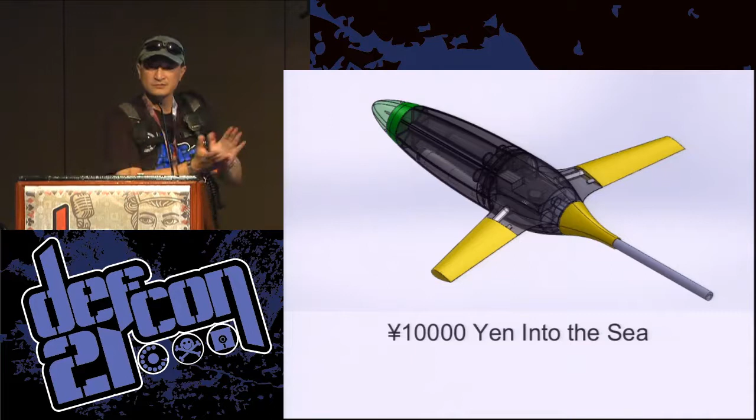Hello. So, as he said, I'm Flipper. This is my talk, 10,000 yen into the sea. Essentially, well, just to start with, can I get a show of hands? Who enjoys filling up their gas tank? Yeah, I'm not a big fan of it either.

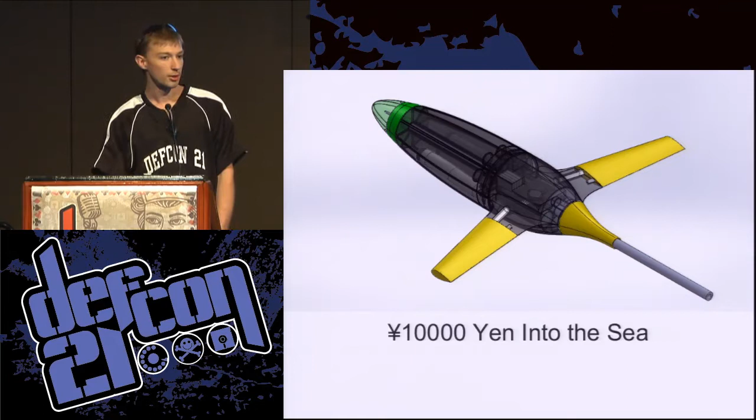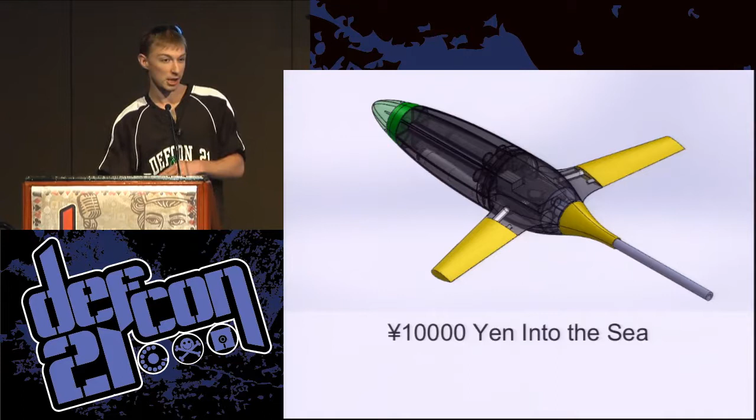Actually, I spent 4 years commuting to and from my community college. 4 years, 2-year program. I had other things to do. So it was a 45-minute drive each way, so I pretty much ended up putting about as much money into my tank as I saved by living in my parents' basement. So all the benefits of living in my parents' basement with none of the cost savings. So that was kind of an interesting experience.

And the reason why this is relevant is shortly after college, I saw underwater gliders, and they kind of blew me away because when you see the typical range and duration of these things' missions, it's pretty incredible. Around 3,000 kilometers on a single battery pack charge.

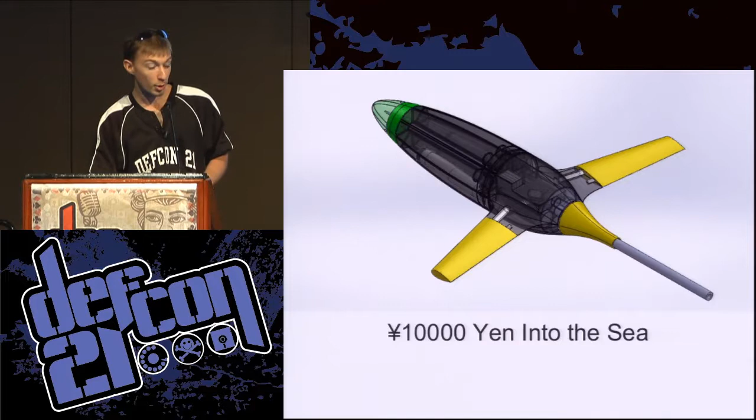And I work with electric vehicles professionally, partially as a consequence of this project. And I got to say, if you can show me a Nissan Leaf that can go 3,000 kilometers, I'll be pretty impressed. One of my coworkers says it's all about the drive cycle.

So, as I said, I'm Flipper, and this is kind of what I do, electric vehicles. Professionally, they're ground vehicles here, underwater. I keep on trying to talk my boss into letting me turn one of our vehicles into a submarine, but so far, no such luck.

So, you know, I'm finished with my education and not much in the way of job options at the time, kind of dead-end jobs, and I'm killing time in the bathroom because I didn't really like my job. Reading the Oregonian, and I see an article on Oregon State University's underwater glider program. And they were talking about how they work. They show a little cutaway diagram, and I'm kind of blown away.

It's all like, wait. How much do these cost? I could do that. You know, $100 tops. So that's where the 10,000 yen comes from, is at one point in history, that was about $100. A little bit of Jules Verne's too. So in order to build an underwater glider for $100, you kind of have to be an engineer or hacker, one of the two. I definitely wasn't an engineer, so I guess that's why I'm here at Defcon with you guys.

You know, how do you design an underwater glider? You have to learn how to design an underwater glider. So it was really the start of an education, self-taught in design and manufacture of underwater vehicles. I was studying machine tool technology at the time, manufacturing engineering type stuff, eventually got a transfer degree. And so it was a great vehicle to actually learn, and it gave a really good incentive to study STEM subject matter, and ultimately transitioned into an interest in an engineering transfer degree.

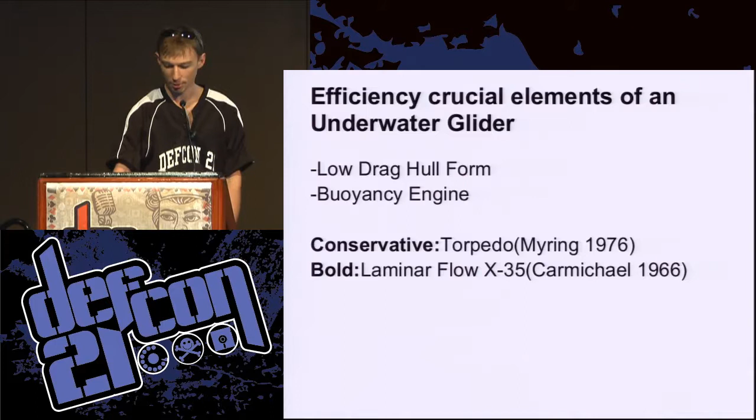So these were the design requirements I went into it with. I wanted the barriers to entry to be super low because even though I had access to a milling machine and a lathe, not everybody does. So I wanted all of you to be able to take your Defcon CD, take the solid models that are on there, and go home and build one of these yourself.

And then, range and efficiency, you're not going to take a 2 order of magnitude reduction in cost without taking some hits on range, efficiency, performance. So it was kind of a best effort basis. I'm pretty optimistic. I've got a fairly large battery pack compared to the current consumption I'm looking at. So we'll see.

Overall, the check valves involved were kind of a prohibitive feature that just disillusioned me of this concept. So I considered a lot of things. I struck out electric motors and linear actuators pretty early on in the process because, at the time, a lathe and milling machine were pretty much a requirement to make those happen. The weight of using an off-the-shelf linear actuator was pretty massive. You'd end up with like a scuba tank pressure housing, and that's no fun.

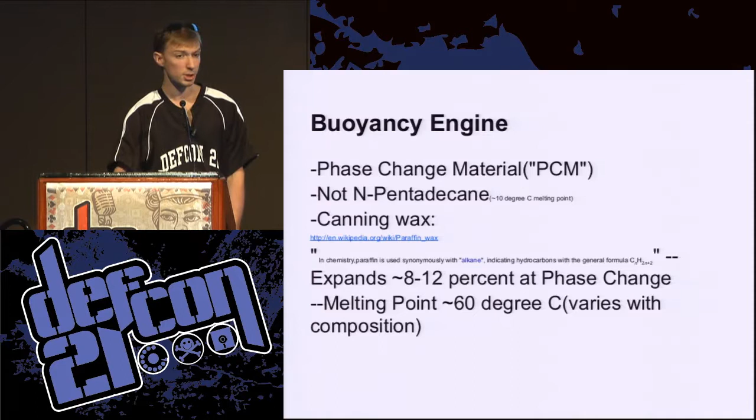And when I first started on this project, there really wasn't much available in the way of low-cost inertial navigation. You had the MultiWii project, which I thought was pretty genius. They took a Nunchuck and a Motion Plus from a Wii game console, and they actually made a 6 degree of freedom IMU out of it.

Welcome to the future. This is really cool. This is a $33 board available from Hobby King, and I can't imagine they have more than $5 of profit margin built into that. You get a really cutting edge chip on there called the MPU 6050 or 6000, one of the two, depending on if it's SPI or I2C. But the point is, it's got a built-in magnetometer, and so it can do complete 9 degree of freedom sensor fusion, which is the ability to distinguish between gravity and linear movement through space. And when you're trying to actually integrate your inertial data, you'll run into problems unless you have some pretty good math background or a fantastic product like this behind you.

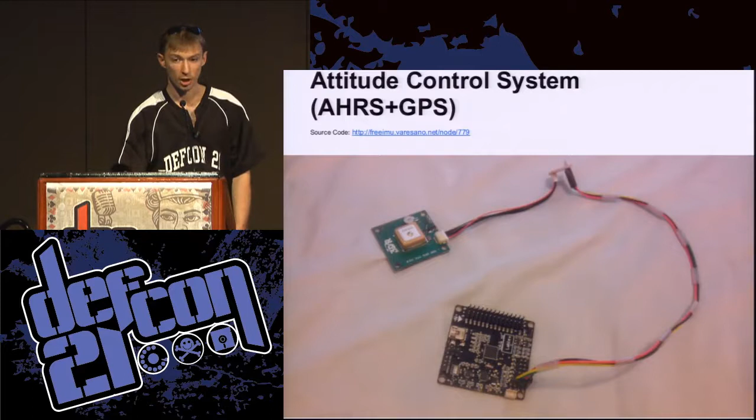That's the 3DR Robotics GPS chip. It was available, and it's actually buried in the nose cone of my vehicle right now, coated in a nice thick goop of RTV compound. The whole design was kind of fun. I spent most of the past year working on that specific aspect because it ultimately guided the production of the rest of the vehicle.

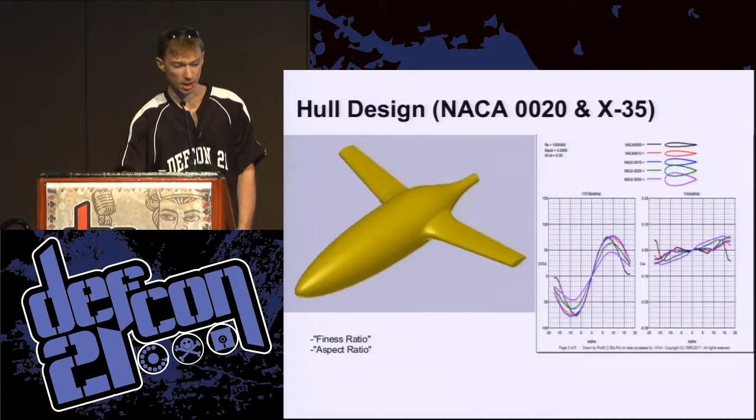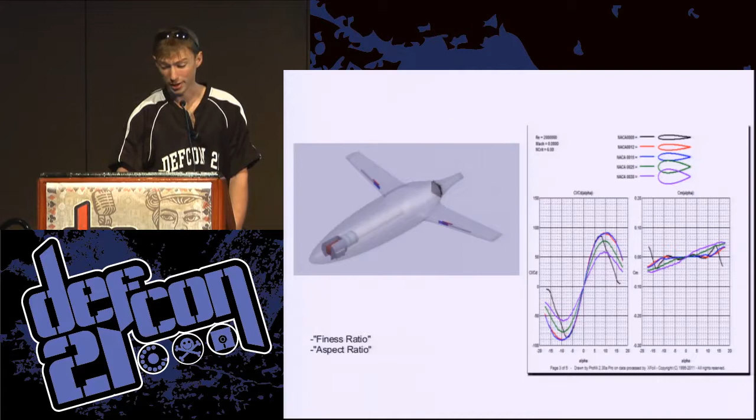So first concept, I took a polycarbonate tube and a wax motor used to control a dishwasher latch, funny enough: high force, high latency, low efficiency, unfortunately, as I found out later. And oh no, I'm not sure if I'd submitted my CFP at this point, but I was kind of sweating at that time because I'm apparently really, really bad at fiberglass. Who knew? The original idea was that I would be using hot wire foam cutting techniques to actually generate the hull form and then lay fiberglass over it. And as you can see from this picture, that wasn't going so hot. So not as easy as it looked on YouTube. I was not going to hit my deadline at that rate.

So throw money at the problem. I've generally found that when time is of the essence, money can generally buy you time back. So I bought a 3D printer. I really am happy I made that decision. 3D printers are really cool. One of the design requirements, being able to build this thing in my underwear, check.

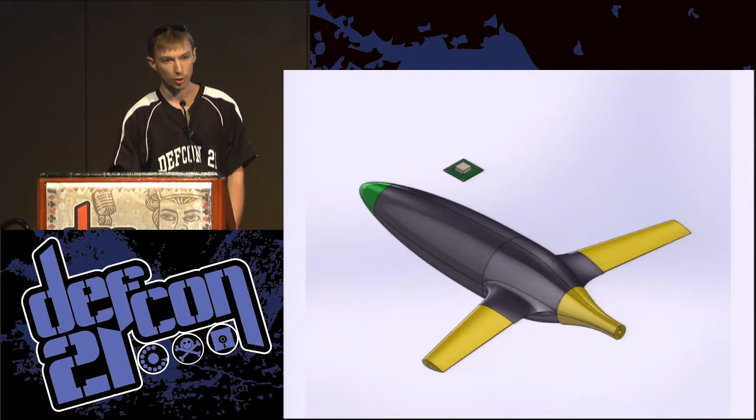So similar design, same hull form, but now broken into smaller chunks to help with the print volume, and also trying to minimize the overhang of the printed parts. Support material is an option, and one of the largest prints on there actually was using support material. But 1 month turnaround time, you really can't argue with that.

And I knew 3D printing could really help expedite the design process and getting you through multiple iterations. But until I'd experienced it firsthand, kind of saving my bacon on getting a proof of concept out the door and second, third revision, whatever, I was incredibly impressed with the value.

That 3D printer I showed was a Rostock Max. It's a Delta Bot style design, and they are one of the coolest to look at when they're running. Cartesian Bot's a little bit lame, in my opinion. And that's the robot you see in front of you.

So, $100 price target, $31 a kilogram for my plastic. That could be cheaper, but let's try and be generous just to make sure I don't underestimate. So $21 in plastic. So if you throw a significant amount of capital investment at the prospect of building injection molding tooling, then that could come down significantly. Remaining bill of material was actually published to the DVD, if I remember correctly.

And I mentioned there may have been some hiccups along the road. This bill of material is definitely not accurate to the 30-cent mark, because the phase change material concept ended up working out to not just moderately inefficient to virtually unworkable, at least with the energy storage system I selected.

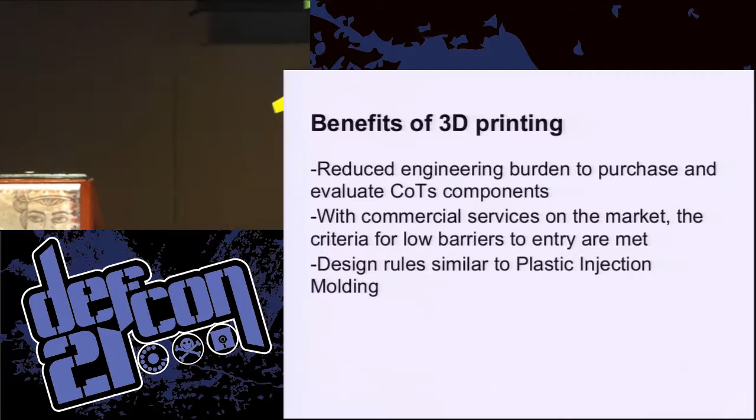So I ended up using commercial off-the-shelf McMaster-Carr parts to build the assembly, which you can see in white on the actual robot now. So the only change between what's on your DVD and what actually is here in front of you is the white assembly. Everything else I was able to recycle between designs. So modular design is a good thing, I guess.

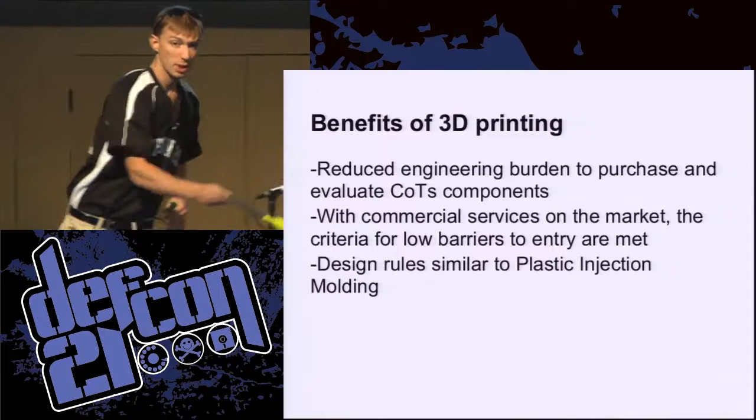The gray pipe was a really good choice. Sorry about that. The gray pipe was a really good choice because it allowed for routing of the wiring, and ultimately acted as kind of a skeleton or a backbone for the entire vehicle.

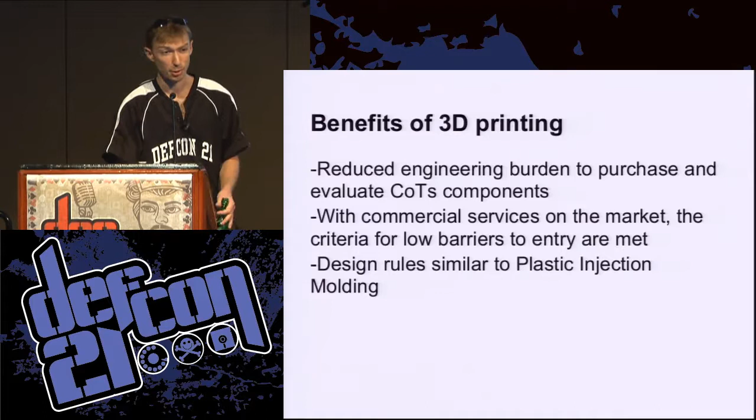What I learned from that process is 3D printing is awesome, and the great thing is when you're actually done with it, you don't have to go through an entire twisted new process to design 3D printed or injection molded parts. You're practically already there when you have a working prototype.

What did I learn through the process? I feel like I actually hit a pretty good balance between fail early, fail often, and not making stupid mistakes for lack of planning. I didn't build anything before I had complete solid model data. And that's really valuable when you're trying to avoid these last minute crazed runs to Home Depot, West Marine, AutoZone, whatever it is. If you have a complete bill of materials before you make the first part, you know exactly what's going into the thing, and you don't find yourself running into these issues where parts are colliding with each other.

And then it was also extremely difficult to quantify whether or not a design decision was a good or a bad one, such as the wax motor, until actually trying it. So it was a design decision trade-off to not use so much simulation. And I was pretty happy with how that went, because you can simulate the daylights out of a bad idea and then find out you wasted the last year doing FEA or CFD on a broken design, and then it's all wasted. So prototypes can illuminate things that you otherwise wouldn't be aware of.

So I did this entire thing out of pocket, no grants or funding agencies, and I actually really like that, because I'm accountable to myself, and I don't have anybody breathing down my neck forcing me to chase sunk costs or make bad decisions because I need to save face over that $1,000 I wasted on wax motors. On the other hand, I gave pretty much the profit of the design away for free on the DVD this year. I've probably spent around $15,000 on the project over the past decade. And so I would consider it a dubious appropriation of my retirement savings. But that was the mission from the start.